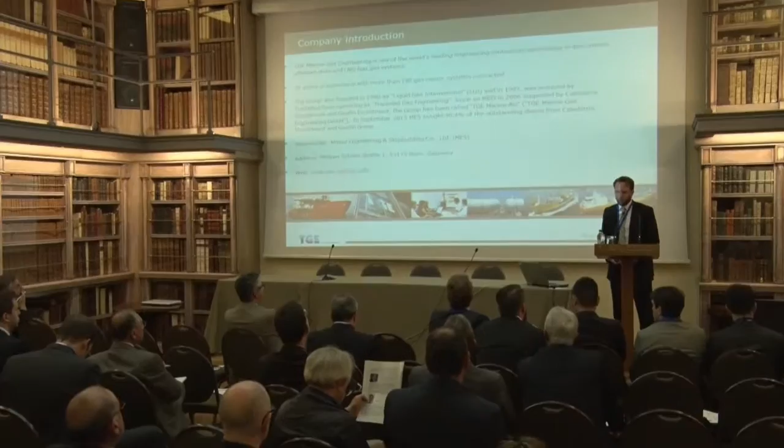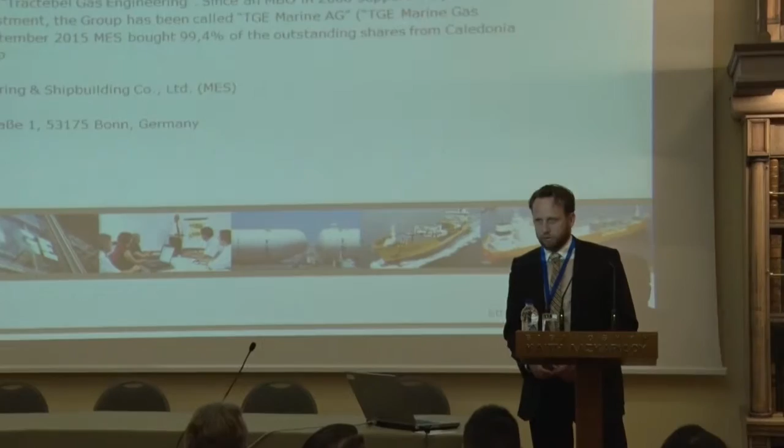I've been working for TGE Marine Gas Engineering for 13 years now, about 2003 I started. TGE Gas Engineering, I always like to say we do everything that is liquefied gas and floats. So we do gas carriers, we do offshore units, and we have been in the market for 35 years.

As TGE, there has been a development in the company. We started in 1980 under the name of Liquid Gas International. We were bought in the 90s by Tractebel - this is still where the T in TGE comes from, and it used to be Tractebel Gas Engineering. Now it's TGE Marine Gas Engineering. We had a management buyout in 2008, stayed for about 10 years with a financial investor, Caledonia, from London, and have recently been bought by MES. That was last year, MES being Mitsui Engineering and Shipbuilding.

Our head office is in Bonn. We also have offices in Shanghai and other countries, for example Japan and Korea. We are represented by agencies elsewhere.

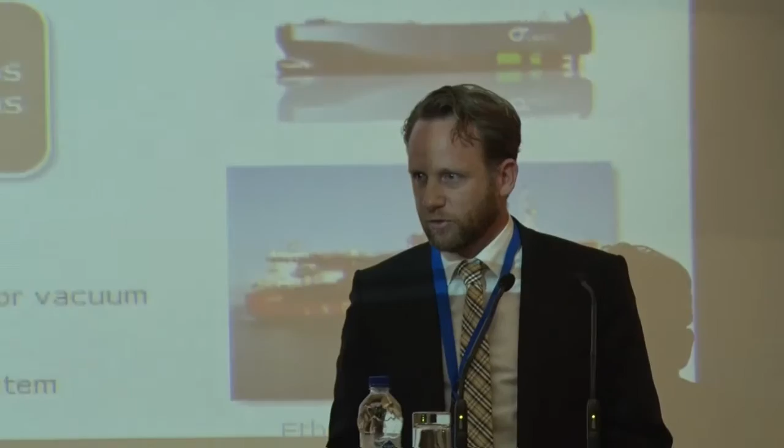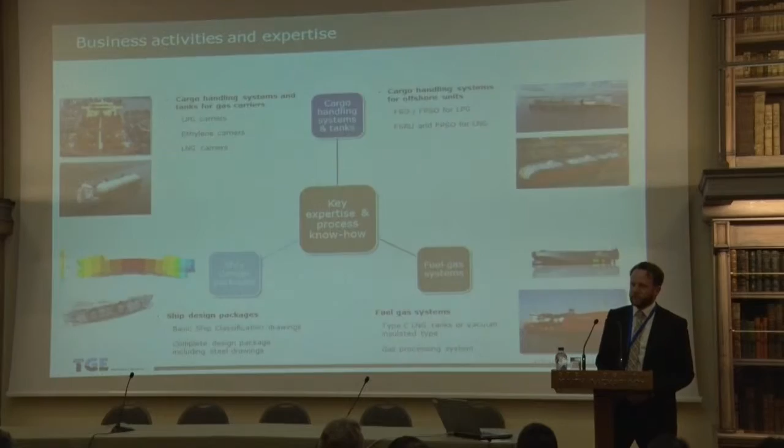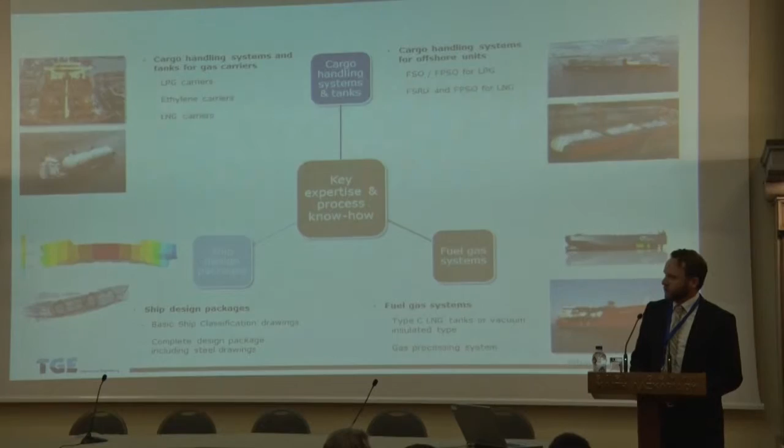Our market as a whole is, as I said, everything that's liquefied gas and floats. It used to also include the land-based side, but this is now a separate entity called TGE Gas Engineering, compared to TGE Marine Gas Engineering. So they're still under the same roof in Bonn, but they take care of the land-based side, while we take care of the marine and offshore side.

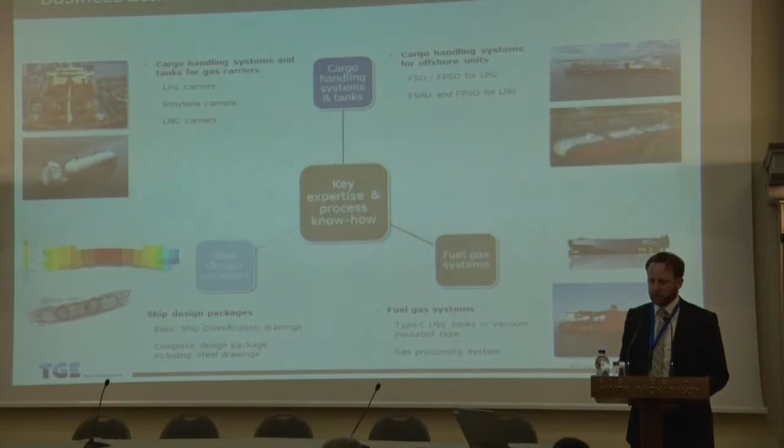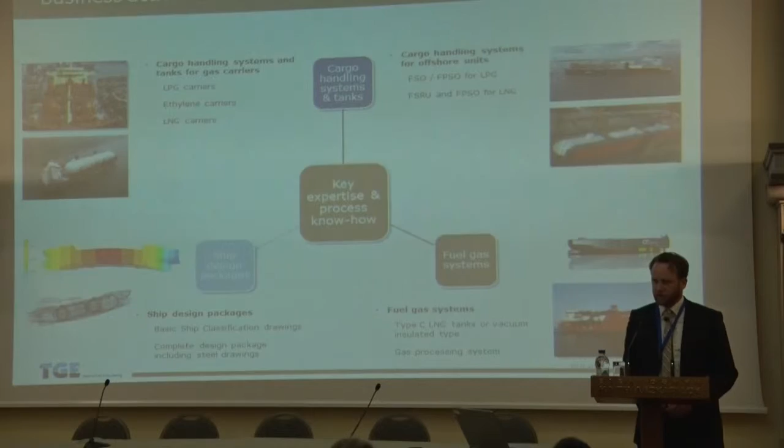Our typical role in a project is an EPCS contract, as we call it - engineering, procurement, and construction supervision. So we design the complete gas plant, deliver the gas plant and the cargo handling system and cargo tanks to the shipyard, and then make sure everything is installed in the right way and works correctly during pre-commissioning and commissioning. Of course, on the back end comes after-sales and support for ship owners, and on the front end, depending on the project's complexity, comes front-end engineering design and feasibility studies, which we also do when necessary.

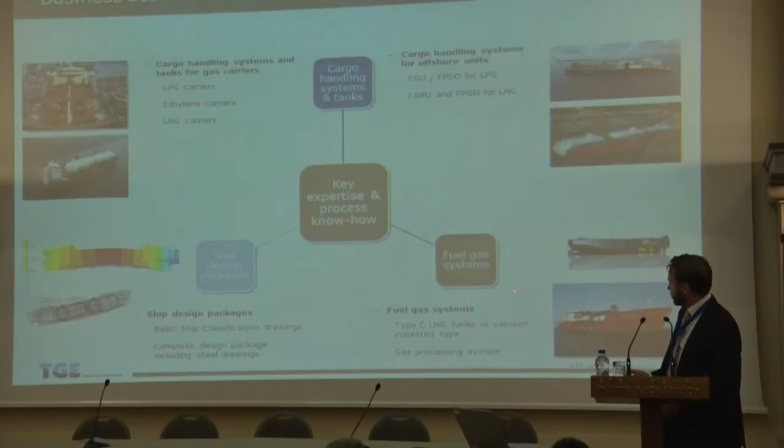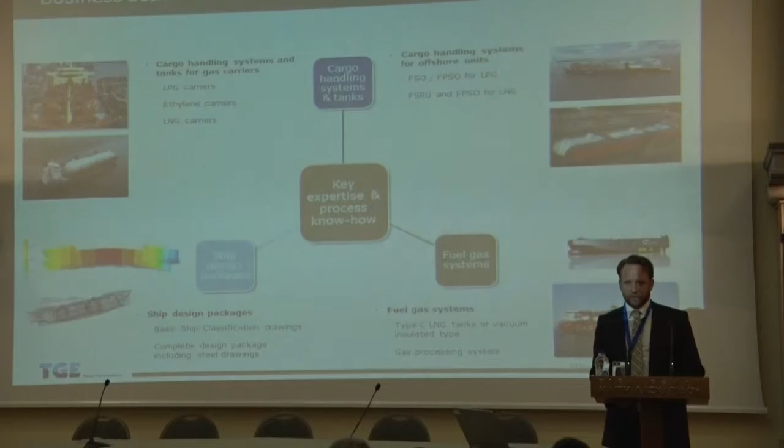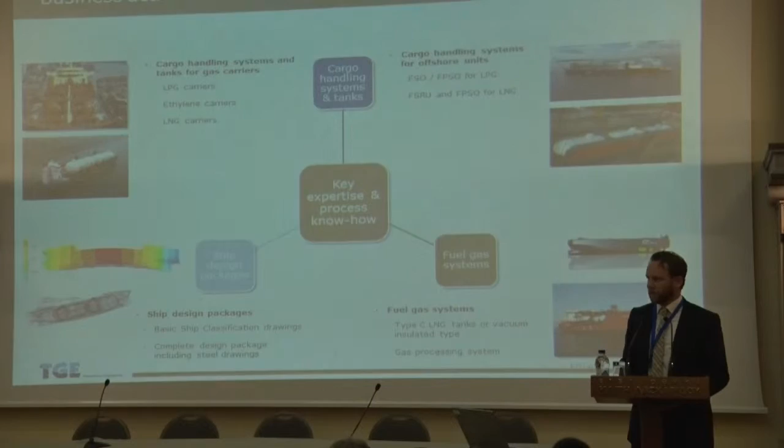On the shipping market side, that's LPG, ethylene, and LNG carriers. We have fuel gas systems - LNG fuel gas systems for any type of vessel and any type of engine. We're not linked to any engine maker, but we have delivered fuel gas systems for Wärtsilä, Rolls-Royce, MAN, and MAK engines. We're also capable of doing ship design services in case the shipyard doesn't have their own ship design services or isn't working with any other ship designer. So it's not an exclusion for us if you come with your own ship design, but we're also able to help you with the ship design if needed.

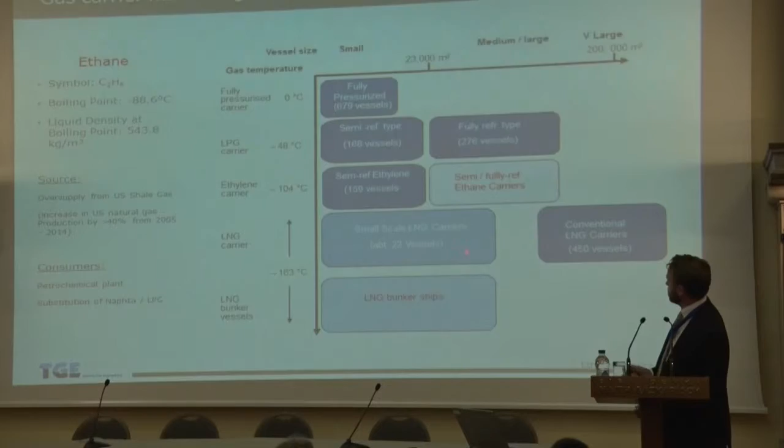This is the gas carrier market, shown by temperature and size. Looking at the complete gas carrier market - at the very small range we have the fully pressurized carriers, and at the very large, very cold range we have the large LNG carriers. In the middle here is our typical field in the market: handy size and semi-ref LPG and ethylene carriers. Especially in the ethylene carriers, this is where we consider ourselves the market leader.

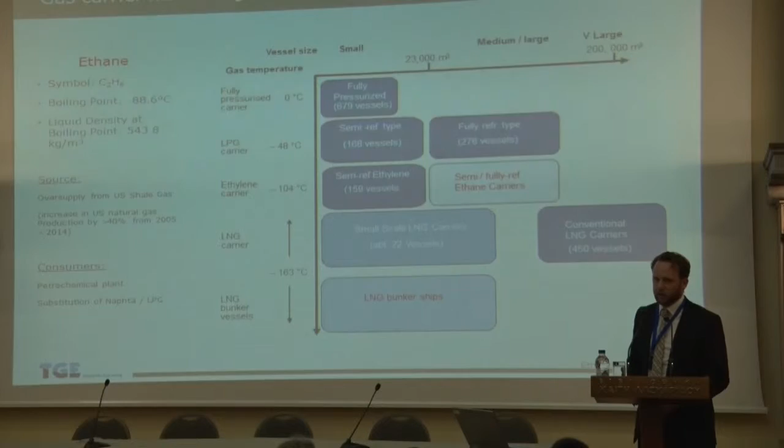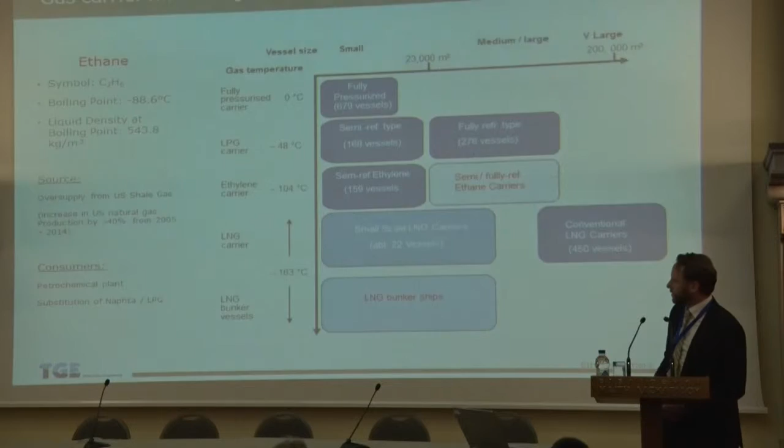There are two new segments which we already heard about today: the semi-fully ref ethane carriers - until 3 years ago, the largest ethane carriers were 21,000 cubic meters, now we've heard today that the largest ones are 87,000 cubic meters. Another new market segment is LNG bunker vessels. We've also been working in the small-scale LNG carrier segment, where we've delivered systems for 22 vessels.

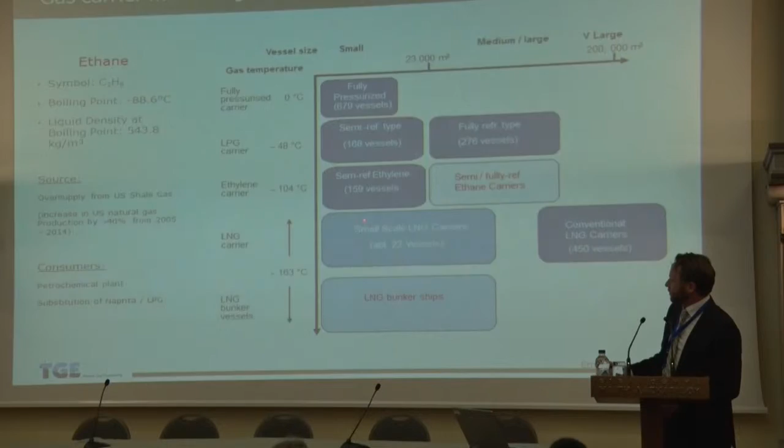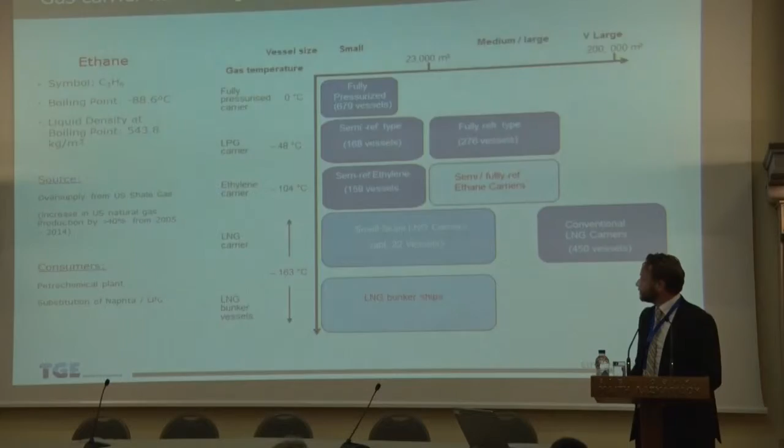This is for the transport section, and now this is the new one which comes into the LNG bunker section, where we deliver LNG to the consumers using LNG as fuel. And these are the two market segments I would like to concentrate on in this presentation.

Starting with the ethane market, in terms of technical challenges, we already heard today that the ethane has a very high methane content coming out of the US shale gas. We need to look into the propulsion. We need to look into the tank types. So up to now, there's no consensus in the market, I would say, on the tank type.

We see that membrane tanks are being built. We see a project with bilobe type C and trilobe type C tanks. We have our design with bilobe type C tanks. So it's still a very much evolving market, and there are many possibilities there, which has to establish itself.

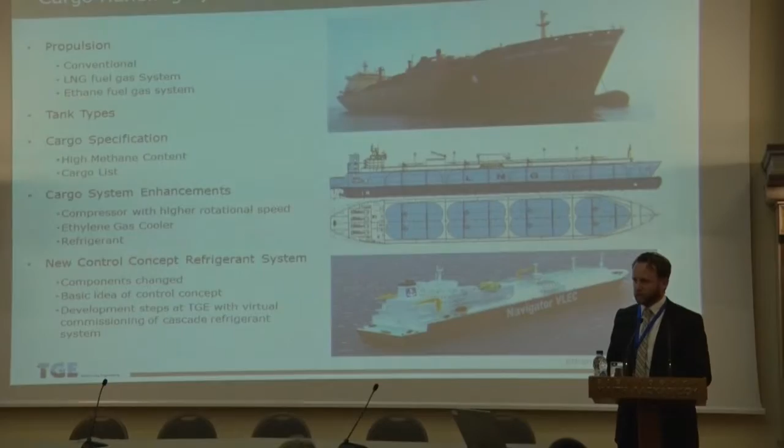Unfortunately, on the very large side, let's call them VLECs, the market is a little bit slow at the moment due to the oil price and the price difference in naphtha and ethane. So the volatility of the market that we would have seen on the old naphtha to gas range is not really there anymore. So a lot of the investment decisions that have been taken and triggered this market maybe would not have been taken in today's environment.

On the other hand, the shale gas from the US is a market which can be ramped up and down a lot quicker than the offshore oil and gas market, for example, because it's smaller entities.

So looking into this, we have been in the market of the largest ethylene carriers for 15 years. About 15 years ago, we delivered for Navigator the 22,000 cubic meter ethylene carriers, which were the largest ethylene carriers at that time, and it was questioned by the market if these vessels would ever be utilized. And today we see vessels of 35,000 and 87,000 cubic meters.

So this was a very early development, which has definitely paid out for the owner at that time, and in the meanwhile a lot more, because I think the vessels are more or less fully utilized on ethylene now.

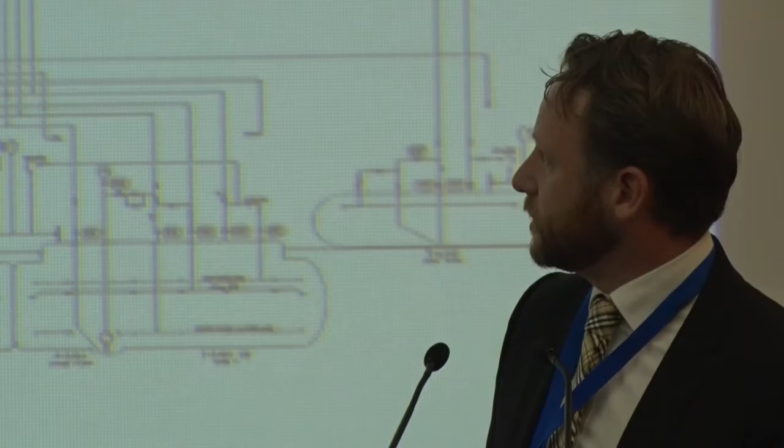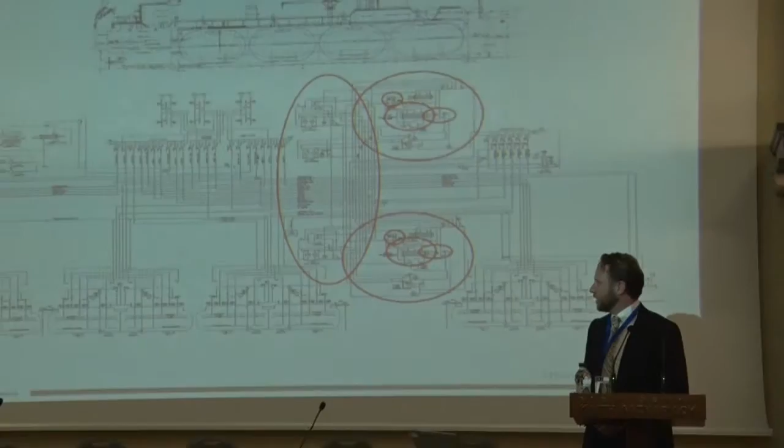So looking into the systems, 10 years later we had the same order from the same owner at the same shipyard of 21,000 cubic meters. So going from 22,000 to 21,000 cubic meters, and basically the same project again. We looked at the old project, and together with the owner, we looked into what kind of improvements we could do, especially on the cargo handling system. And what we identified is we can improve cooling rates and we can improve loading rates when the vessels are trading on LPG.

One item we included was an ethylene gas cooler, where we pre-cool the gas using the refrigerant cascade system. If you look at the p-h diagram, this gives us an advantage in the ethylene gas cooler.

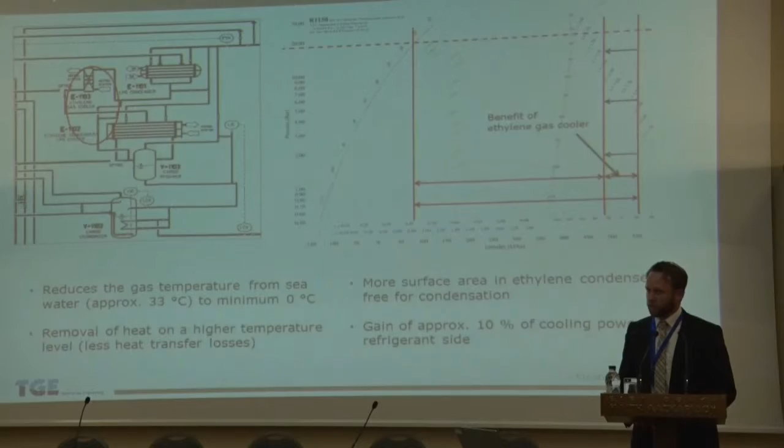And I won't go down into the whole details because I think I only got 15 minutes and we are almost ready for the coffee break. So I don't want to bore you with the technical details, but you're more than welcome to ask later today or during the coffee break.

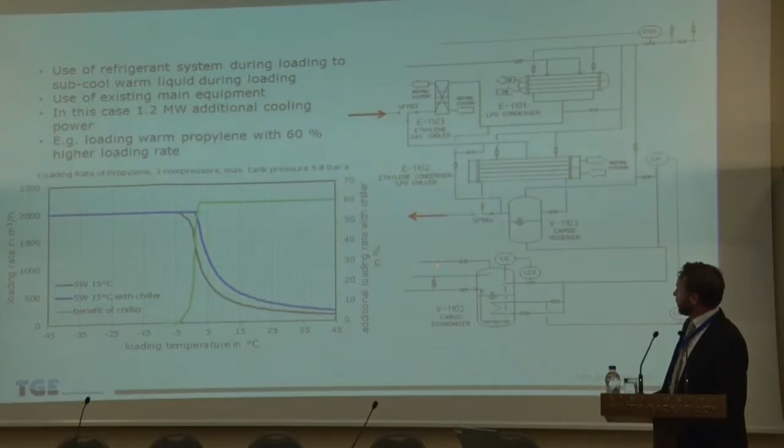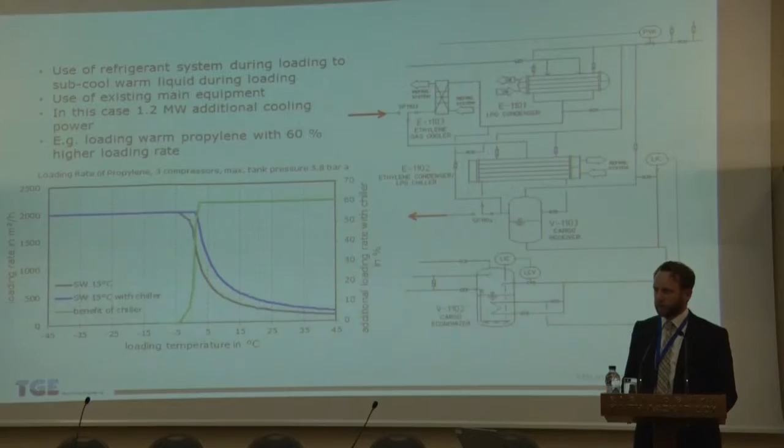The other thing we did is we integrated the LPG loading sequence or propylene loading sequence into the refrigerant cascade system. So we're using the ethylene condenser in a chiller mode when we're loading LPG, and that increases the loading rates for warm LPGs by up to 60%.

That was one too much.

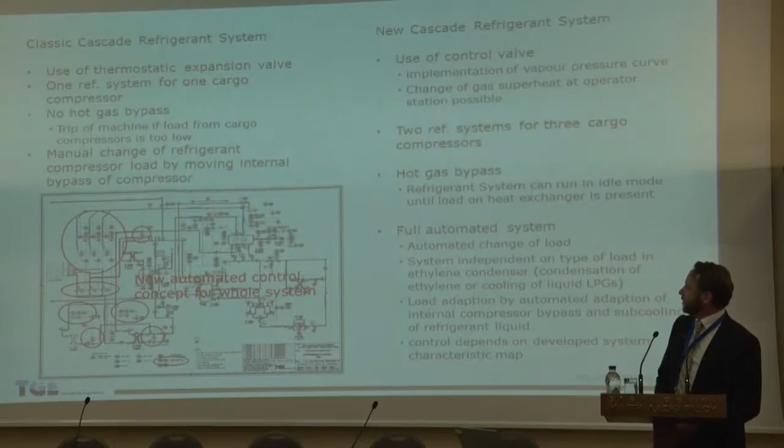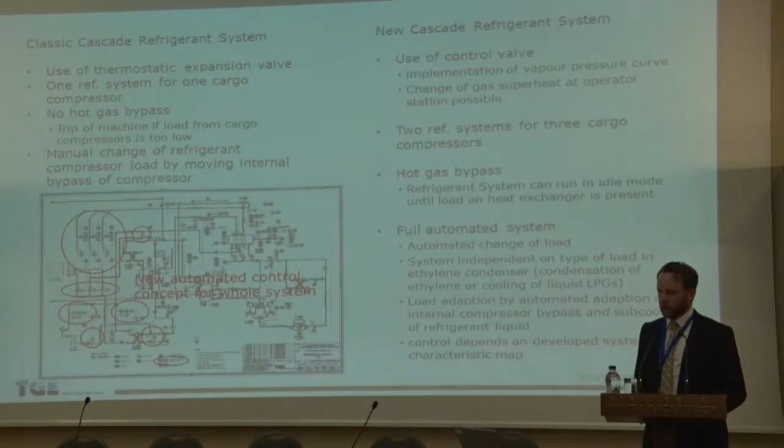Another item we looked into was the whole concept of the refrigerant system. We have been asked by the owner at the time to make it a lot more automated, to have the refrigerant compressor follow the cargo compressors, and that's what we did using a couple of changes in the system. We went from thermostatic expansion valves to control valves.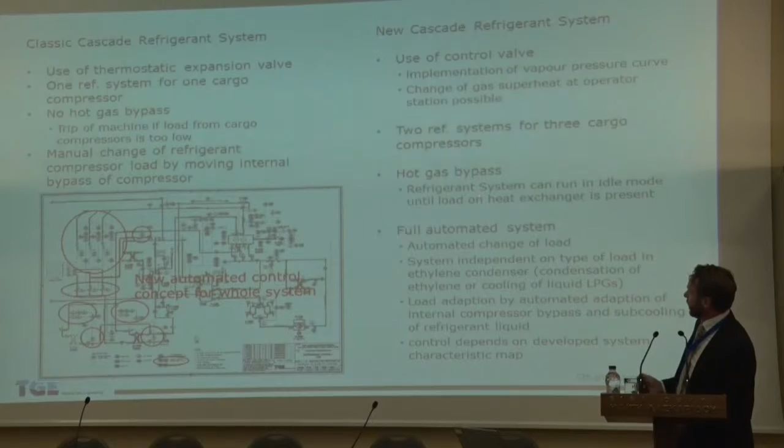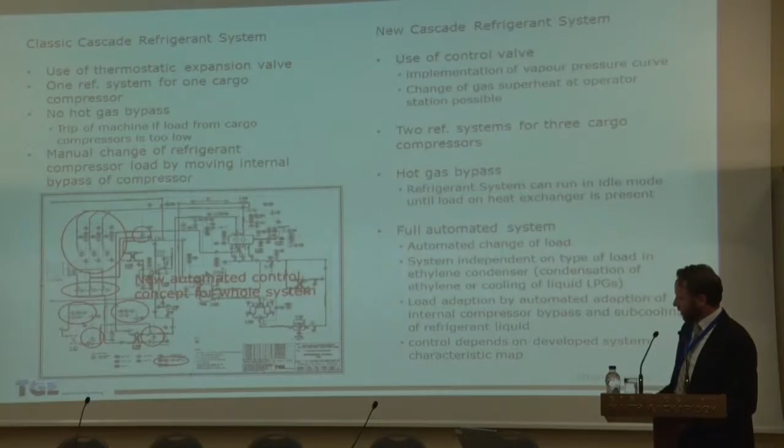The challenge we had is we're using 2 refrigerant compressors on 3 cargo compressors, so it's a 3-on-2 system, which makes it a little bit challenging to control, especially if we're talking about automatic control and automatically following the load of the compressor. So at the end of the day, we came up with a fully automated system.

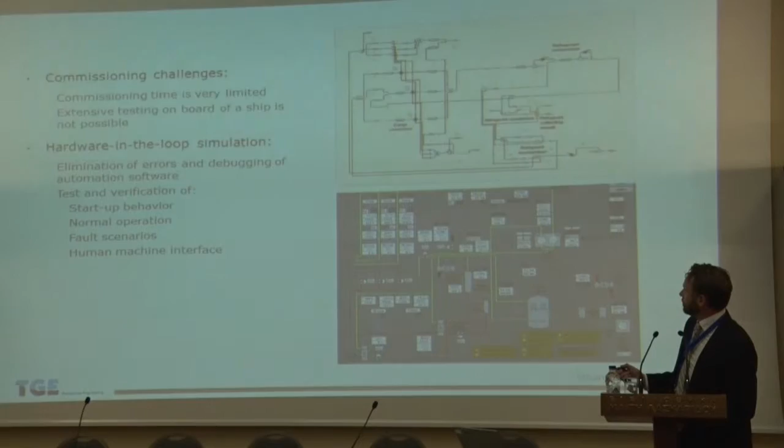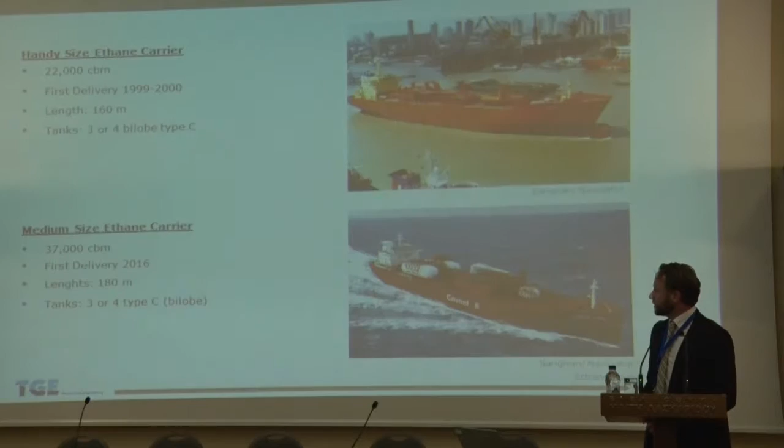We did a full simulation on that, so we could basically commission the system virtually before we went into the gas trial, and that helped us to have a very efficient gas trial and a very well working system during the gas trial.

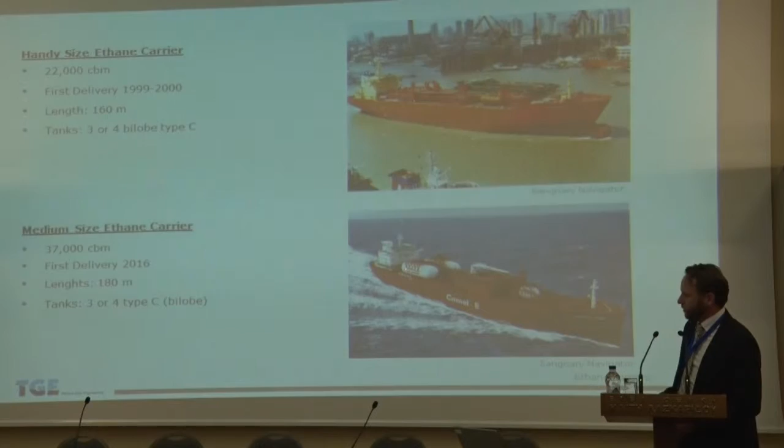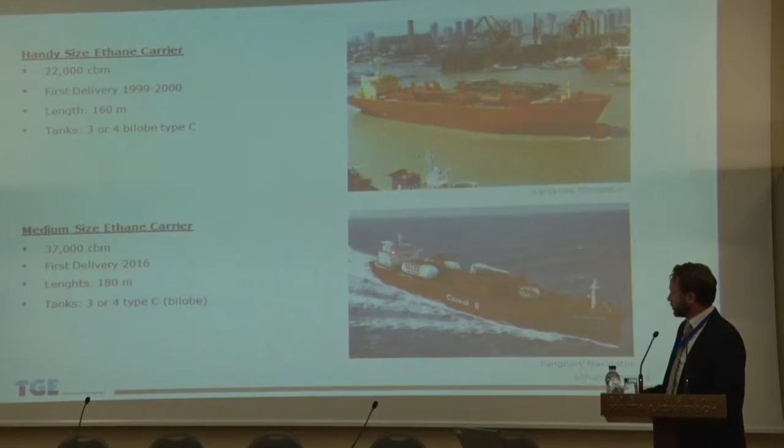The deck tanks can be used either as cargo tanks, so increasing the capacity from 35 to 37, or can be used as LNG fuel gas tanks, because the vessel has a dual fuel engine based on a high pressure ME-GI propulsion with high pressure pumps, and we delivered the complete cargo handling system, including the fuel gas system for this vessel.

And this is also the link to the second part of the presentation, because now we are looking at LNG as fuel gas, and now we're looking at where does the LNG come from and how do we get there. We are in a very lucky position that we were able to win the first 3 projects for LNG bunker vessels for the European market. There is the Shell vessel.

This is the 6,500 cubic meter LNG bunker vessel built at STX yard in Korea. There is the NYK Engie vessel, 5,100 cubic meter LNG bunker vessel. And there's the 5,800 cubic meter bunker vessel, which will be trading for SkanGas, and it will be owned by Sirius Veder as a joint entity.

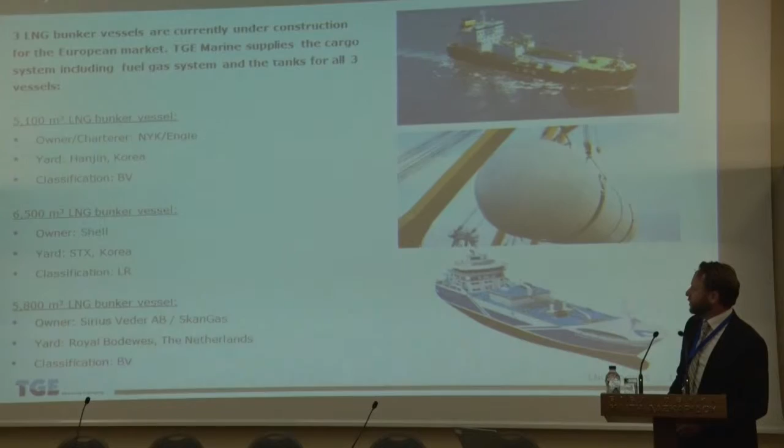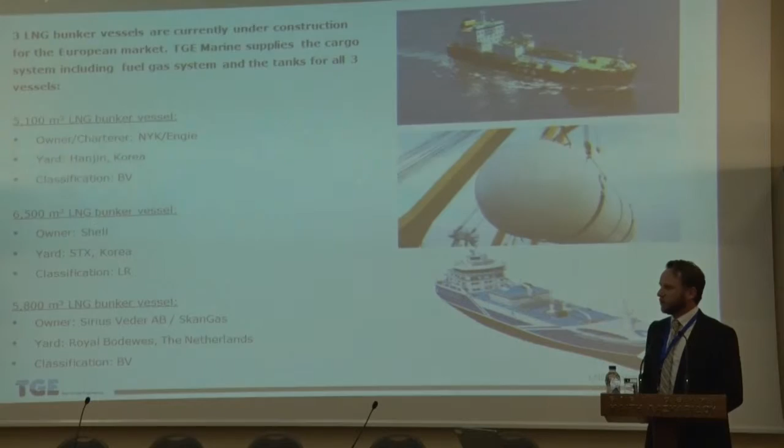So over the last 2.5 years, we have developed the specification for the vessels together with the owner and the shipyards. The first one was contracted 1.5 years ago, and the first ones are going into service this year. And there have been quite some challenges looking into the cargo handling systems and the new requirements.

We are coming from the small-scale LNG market, where we have been quite successful, starting with the Coral Methane here. I think it's one of the most famous vessels in the small-scale LNG market, a combined LNG ethylene carrier trading along the Norwegian coast for Anthony Veder.

We have been going up to 15,000 and then up to 30,000 cubic meter with the small-scale LNG, and we have taken that experience and moved it into the LNG bunker vessel, and then added on what type of systems we needed to make the vessel capable of LNG bunkering.

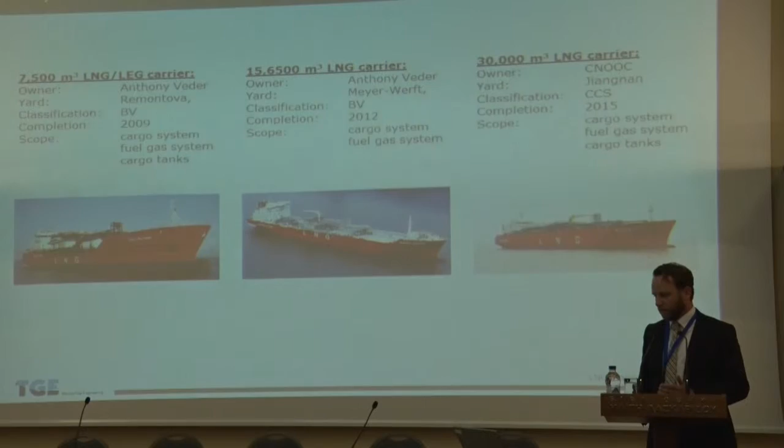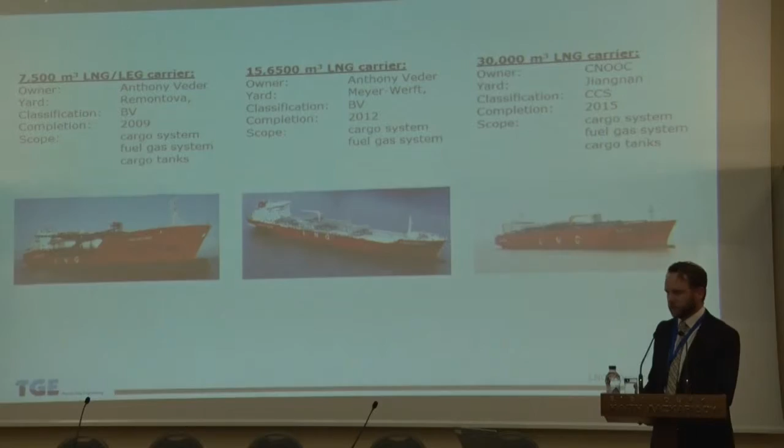Having said that, the Methane has already done operations such as filling trucks on a berth. There was some trading reason for that, and it's something she wasn't designed for, but it's even capable with these kind of vessels. But of course the bunker vessels are a lot more optimized for the task they have.

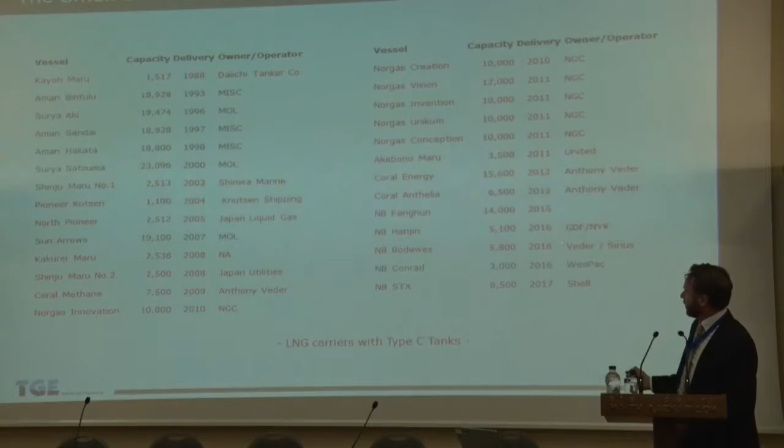On the tank side, if we look at the small-scale LNG market, I think the Type C tanks are pretty well established, and we believe that this is the best solution in the ranges even up to 30,000 cubic meters. So the cargo tanks for the bunker vessels are all Type C tanks. 2 of them have 2 cylindrical tanks, and 1 has 2 bilobe tanks due to length and size restrictions.

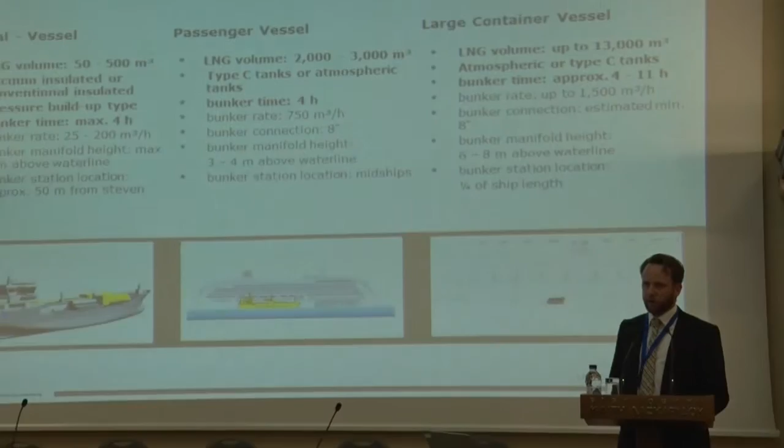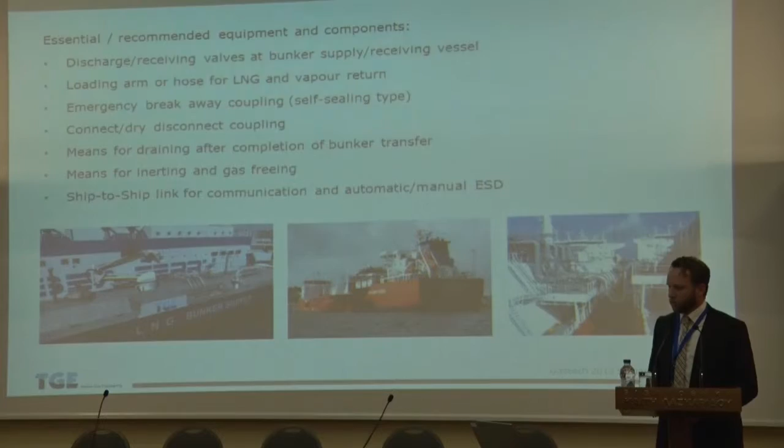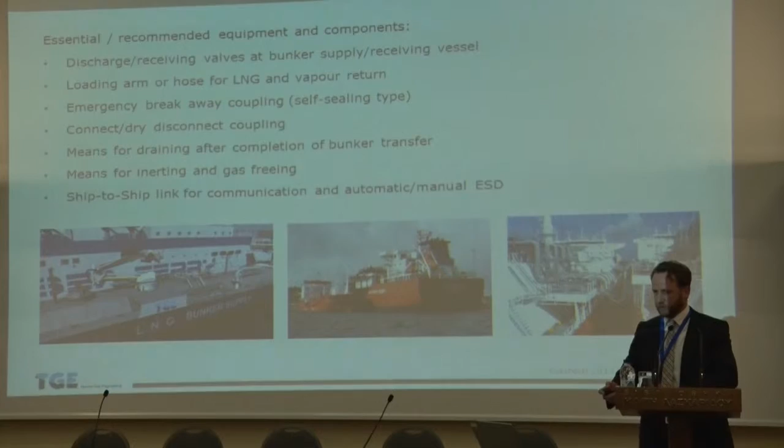So one of the main components is the interface and the ship-to-ship transfer system. Here we see 2 different systems deployed on the projects we have. Shell is using a hard arm, not this one, but an FMC hard arm. It looks not really similar, but it's the same concept basically. The other 2 are using ship-to-ship transfer systems based on hoses, and there's been a lot of development and a lot of design to get this right, because we have seen ship-to-ship transfer on LPG, on LNG, but transferring that into the LNG bunker market is quite a challenge.

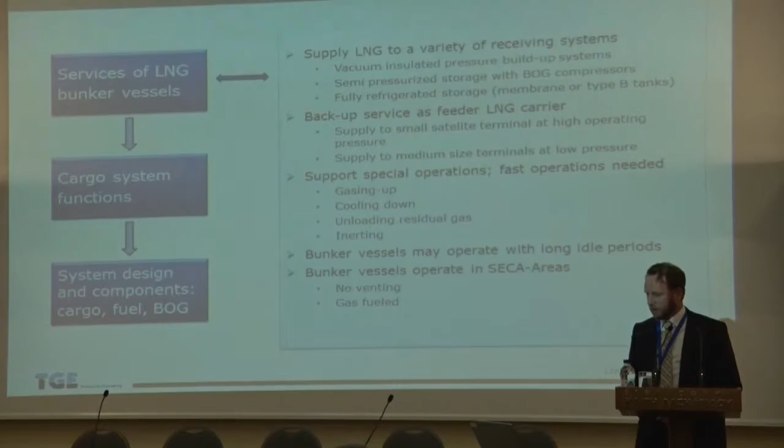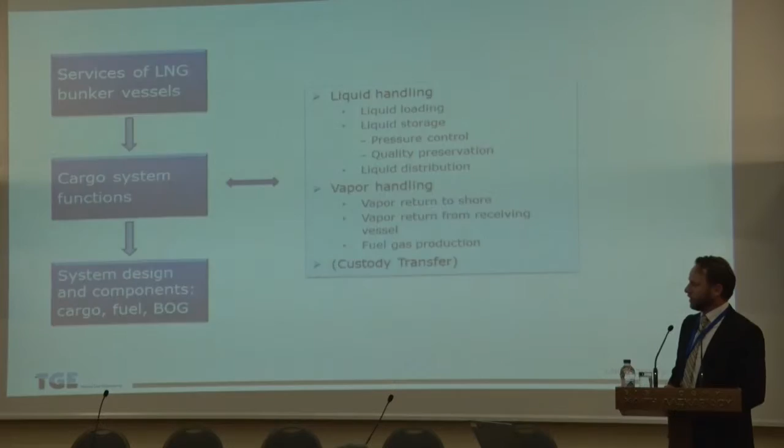For the design concepts, we need to look at the service of the LNG bunker vessel. It supplies LNG to a variety of receiving systems. Could be Type C tanks, could be even membrane tanks. We need to adapt the functions of the cargo system and look at the boil-off gas handling. The cargo handling system function is basically the liquid handling, the vapor handling, and also the custody transfer. On the bunker vessels, we're looking into a more integrated system than on standard transport vessels.

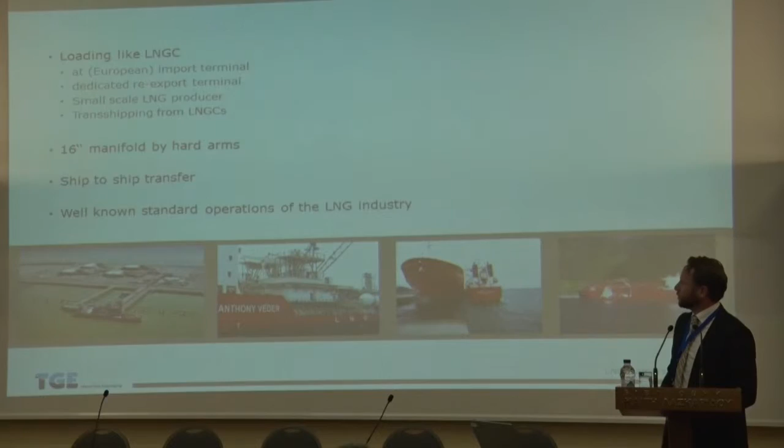The liquid handling is the loading of the LNG. Usually we get the LNG either from small-scale LNG terminals or from large-scale LNG terminals. So depending on the size of the vessel, we need to be able to also load at large-scale LNG terminals. And this is the Coral Methane, I think, loading in Zeebrugge here on the 16-inch loading arms.

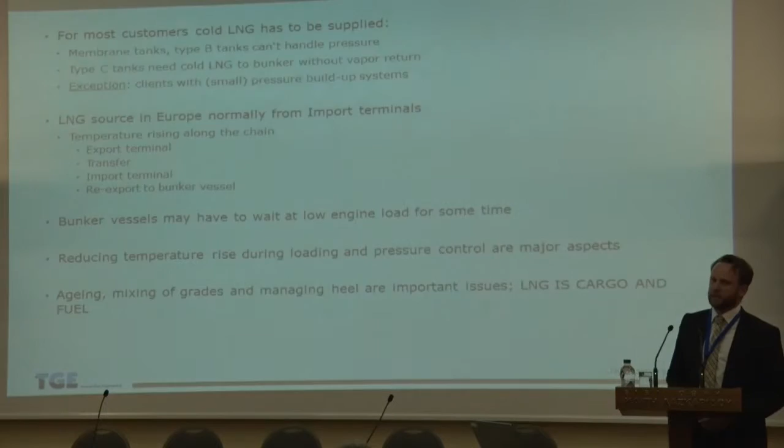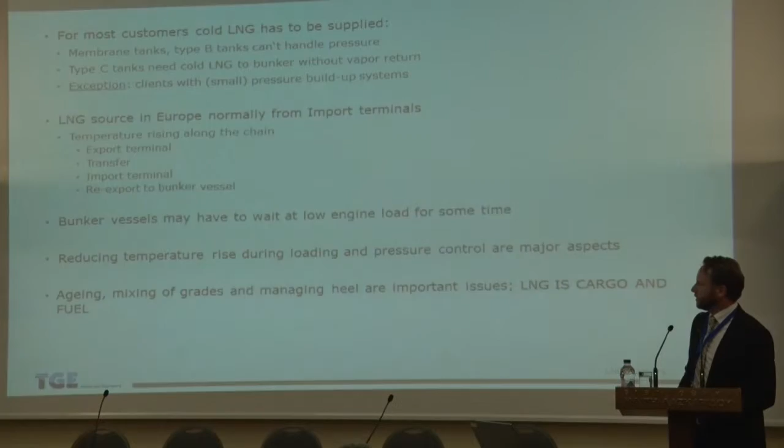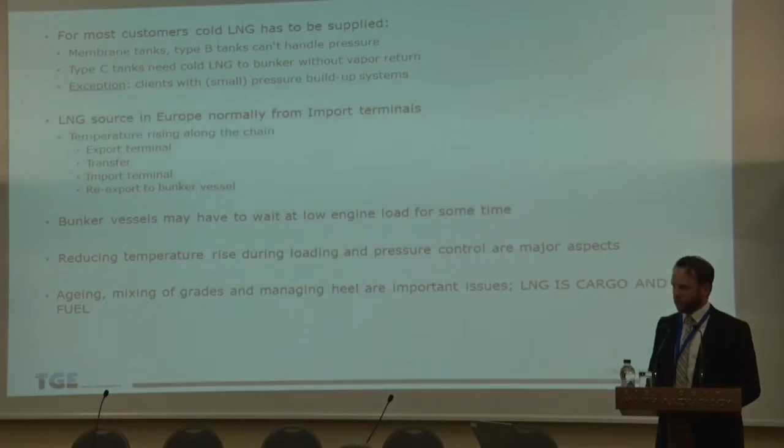For the liquid storage, if we have the LNG in the tanks, as long as we're not talking about very small vacuum insulated tanks, we need to handle the boil-off gas. Usually it's sufficient to handle the boil-off gas by getting cold LNG from the supplier and then burning the LNG in the engines. If we need to go to membrane or atmospheric storage tanks, then in addition to that we need a cooling system.

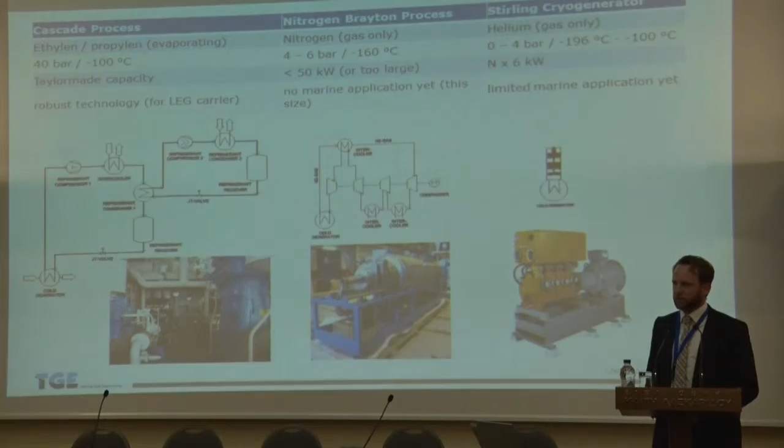So for pressure control, there's different systems available in the market. We have a very small system here based on a Stirling cycle. We have a little bit larger system here based on a nitrogen Brayton cycle. This is deployed on the Shell vessel. And we have, as TGE, developed a cascade type process which we can deploy on anything between 5,000 and 30,000 cubic meters. This is basically an upgrade of our cascade type ethylene system up to LNG. And that brings me to the end of my presentation.

As a summary, I think we have covered two quite different new markets. But the interesting thing is that there are new markets and there are new developments. So for companies like TGE, it's exciting to get into these developments. And the important thing for us is to do this together with the shipyards and together with the owners.

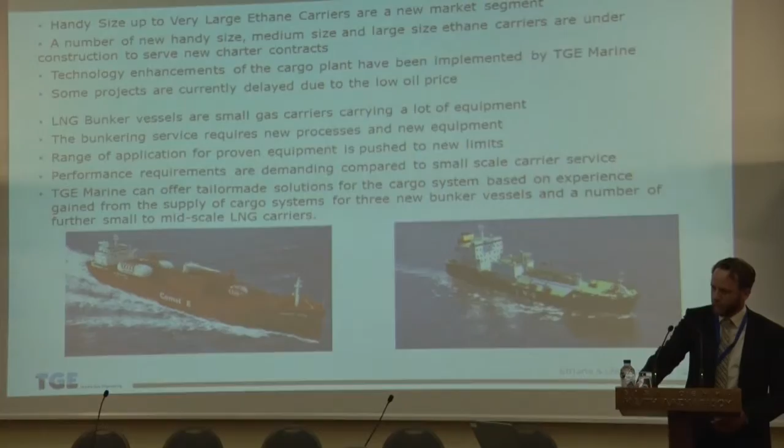I saw with great interest this project you have, an ethane carrier that potentially can use LNG as fuel. Do you see that concept moving also into LPG carriers, and do you see that it will be the long-term solution, or are you focusing now on LPG as fuel for LPG carriers, and ethane as fuel for ethane carriers? It depends a little bit on the speed that the engine makers like Wärtsilä or MAN are able to develop LPG or ethane engines.

There are already some projects in the market where we can use ethane or LPG as fuel. On the other hand, these carriers use multiple types of cargo. So I have an ethane engine, but this carrier is able to load VCM, to load propylene. So if I look at the multiple cargos on the vessel, it's probably more sensible to go in the LNG direction of fuel gas if I want to go for clean gas. If I know that this vessel will trade in LPG or in ethane, I would probably go rather in the direction of an ethane or an LPG propulsion.